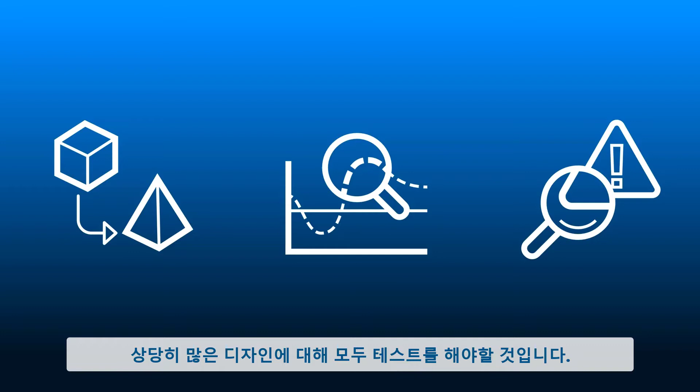When simulating numerous physics and loading scenarios, collecting and making sense of all the data can be daunting and time-consuming, especially when the design and analysis tools are disconnected or limited. But there is a better way.

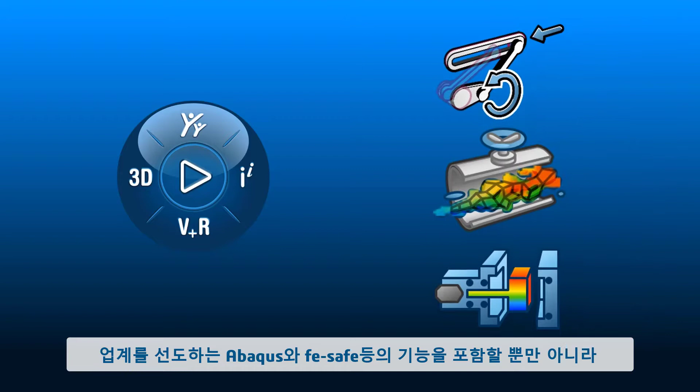The 3DEXPERIENCE platform provides a collection of best-in-class simulation apps built with industry-leading technology, including Abaqus and FE-Safe, and connects seamlessly with SOLIDWORKS. Adam Analyst is working on the Nemo submarine to help satisfy their safety and certification requirements.

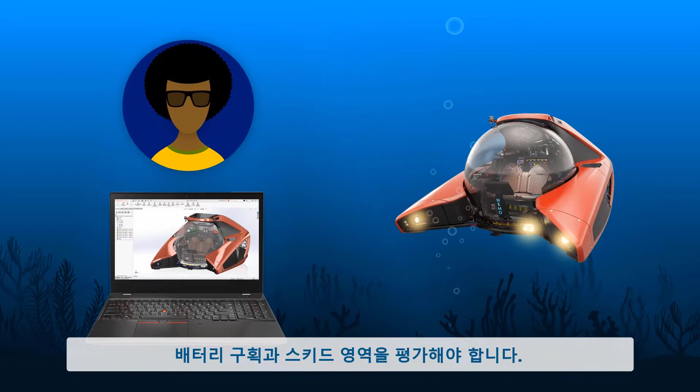When it comes to the battery compartment and skid, he has a few remaining tasks. With a depth rating of 100 meters, it is critical that the battery compartment can withstand the pressures beyond that depth to ensure safe operation. At the same time, weight and cost must be reduced wherever possible.

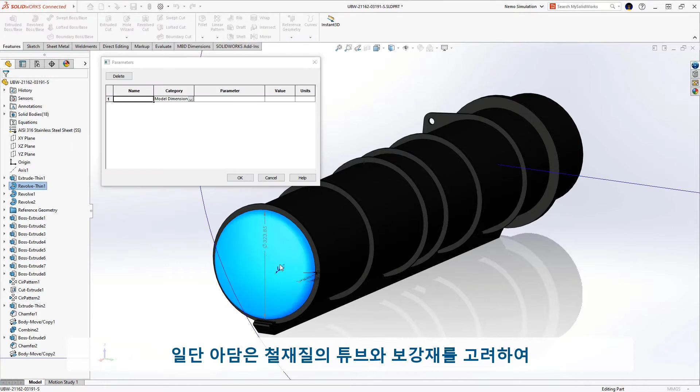Adam considers the thickness of the steel tube and stiffeners, and defines the associated dimensions as parameters to be optimized. He saves the updated model to the platform and launches the Model Assembly Design app to start the simulation process.

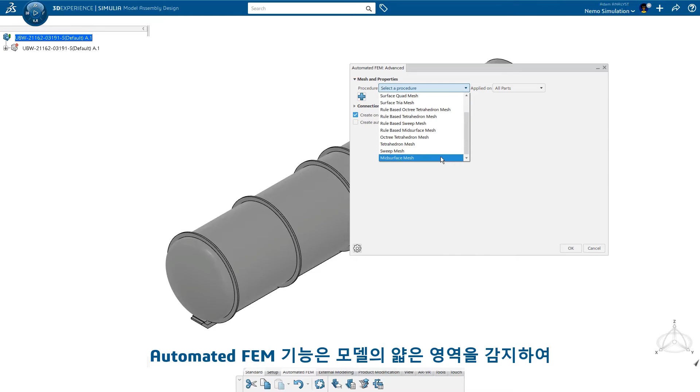First, a mesh is created. The automated FEM recognizes the thin components of the model and creates mid-surfaces and associated shell mesh bodies, all in one command. Next, Adam creates the structural scenario that defines the loads and boundary conditions to simulate the maximum designed depth rating.

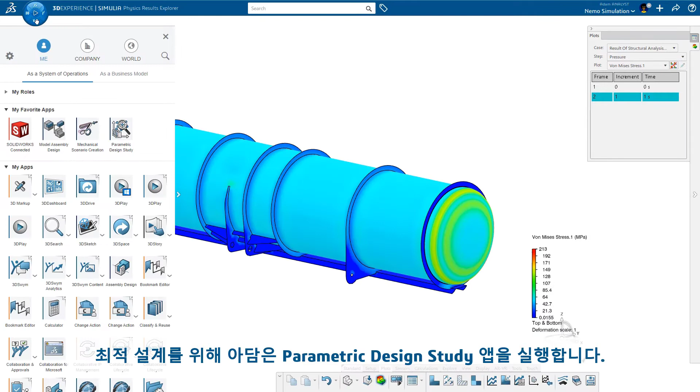At first glance of the results, it is obvious the structure is over-designed. Adam launches the Parametric Design Study app, selects the parameters and goals of interest, and lets the computer do the rest of the work.

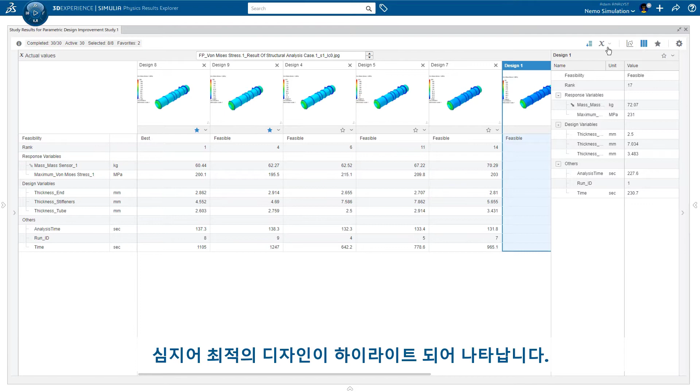When the study is done, Adam can easily interpret and compare the performance of the various configurations. The best design is even highlighted for him, and with one click, a new model and study using the optimal parameters is created, so Adam can take a closer look. But he has additional tasks to complete first.

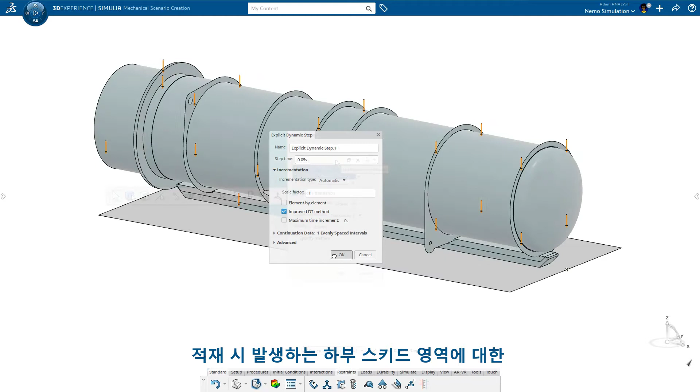The pressure load on the battery compartment happens multiple times throughout the life of the Nemo. Another loading condition that repeats is the impact of the skid landing during storage. To simulate this secondary loading condition, Adam creates an explicit dynamic study to accurately capture the rapidly changing stresses of the landing cycle.

How exactly does the skid come in contact with the floor? Adam lets the solver figure that out with one simple yet powerful general contact interaction.

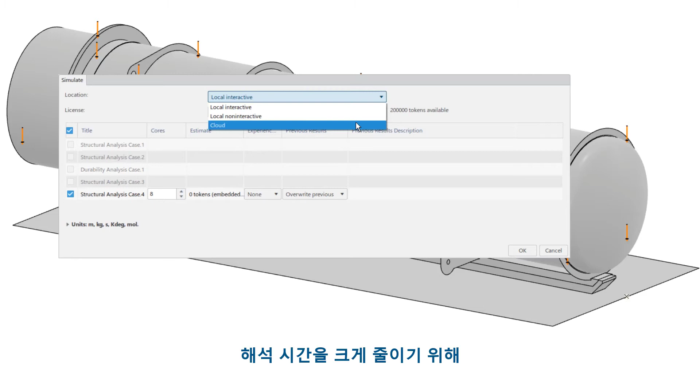To greatly decrease the solve time, Adam chooses to run the simulation on the cloud, leveraging its high-performance computational power. Adam can even shut down his computer while the simulation runs. The stress values are within an expected range.

But how many times can the Nemo withstand both this and the pressure load? To reveal the answer, Adam sets up a durability study.

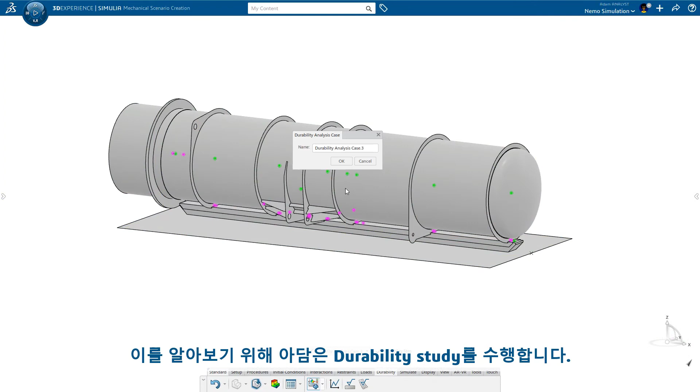He defines a fatigue loading that captures both events. For the explicit dynamic results, he includes all increments to account for the fluctuations in the response. Adam also includes both stress and strain in the calculation to improve the accuracy and solve for both high and low cycle fatigue.

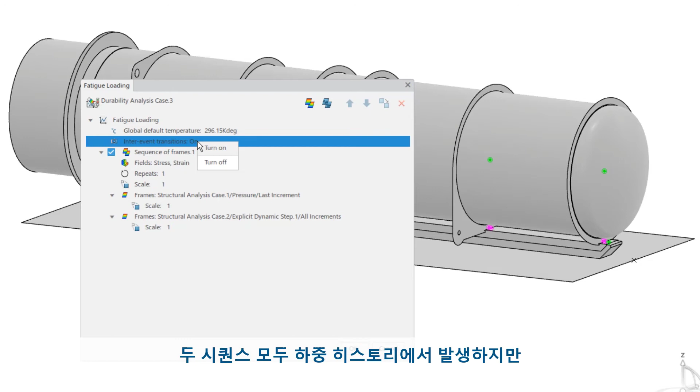Both sequences occur in the loading history, but they are exclusive events, so he turns off the inter-event transition option. Lastly, he defines the base surface finish and solves for the results.

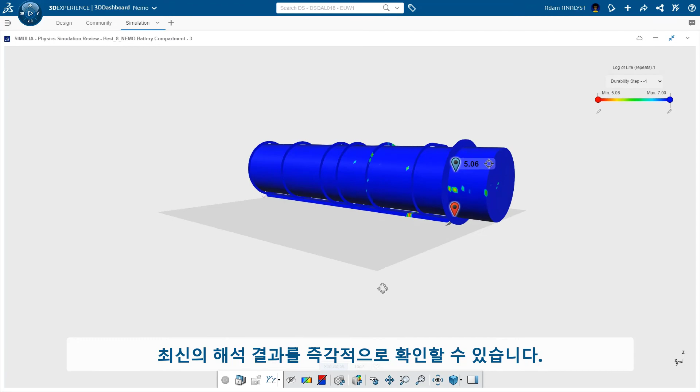The results are not only available to Adam, but they may be viewed by other collaborators from their internet browser, so everyone can get the latest information instantly from one place.

Adam's last task is to identify when and where ultimate failure may occur if the Nemo gets too deep. Leveraging the same study setup from the first scenario, he defines a Riks buckling step, which goes further than the typical eigenvalue buckling analysis, and it's well suited for an unstable and nonlinear collapse of the structure.

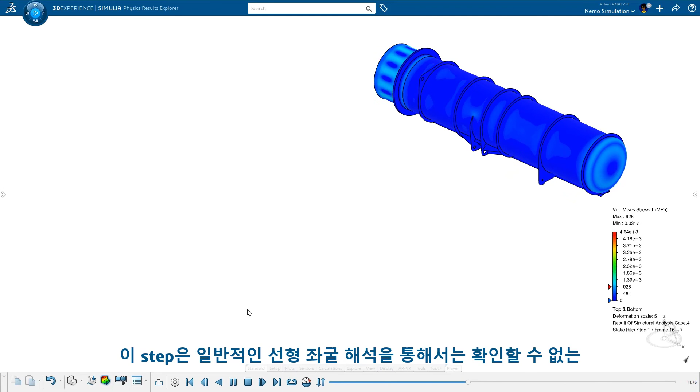And it doesn't require setting up a more complex dynamic analysis. Processing the results is simple too. Adam plots the load factor and visualizes which areas of the compartment will fail first.

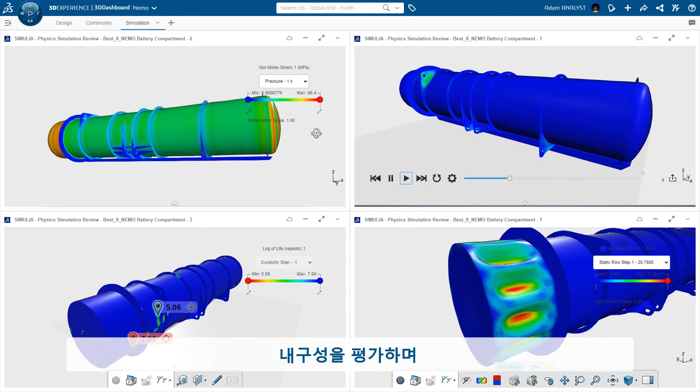By using the 3DEXPERIENCE platform to explore numerous design options, evaluate durability, and understand critical loading events, Adam and his team were able to make informed, timely decisions to help fulfill their safety and certification requirements.